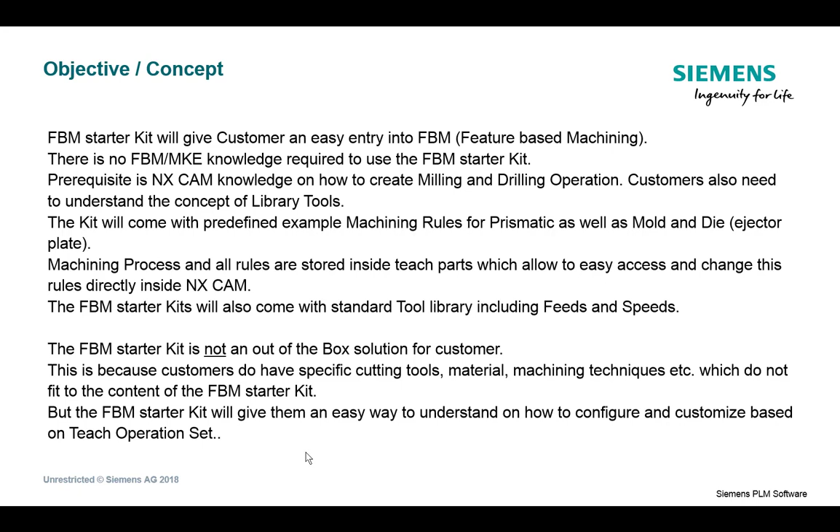The Starter Kit is not an out-of-the-box solution for customers. As we understand, customers will have their own cutting tools, part materials, and machining techniques. The FBM Starter Kit will give them an easy way to understand how to set up and configure their customized environment without any additional training. We recommend a 1 to 2 hour introduction to get started.

The FBM Starter Kit will come with 2 example parts. Both parts are fully scripted, so that you can get an idea how it is working at successful implementation. It's a step-by-step script, so you can follow the script for a mold and die and for a prismatic, as you can see here on the top.

This is a picture of the mold and die example. It's an ejector plate, and on the bottom you see a prismatic part example, which shows some holes and pockets, and including PMI machining. As mentioned, these both are fully scripted, so you get an idea of successful feature-based implementation.

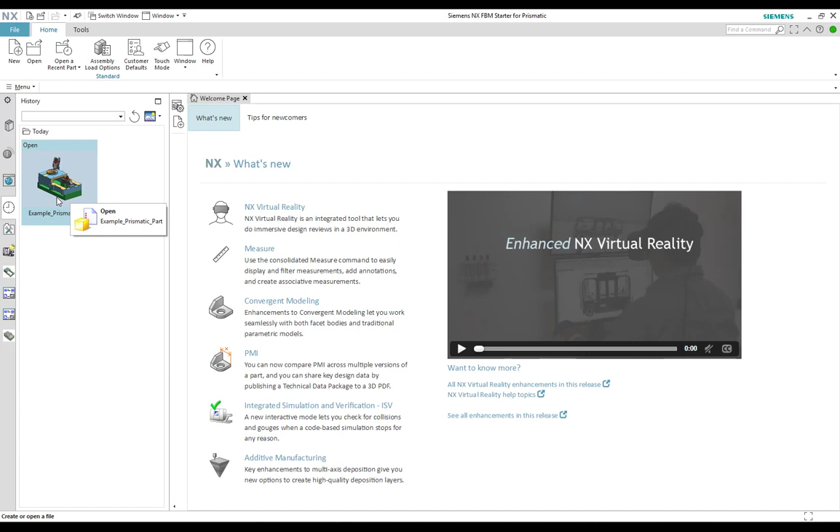Now, let's see how easy it is to program your part if feature-based machining is implemented. This will show the high value of feature-based machining. Keep in mind, this is all done by using the new operation set teaching functionality inside NX CAM. The demo parts, by the way, are also included in the FBM Starter Kit. I will demo the prismatic part example.

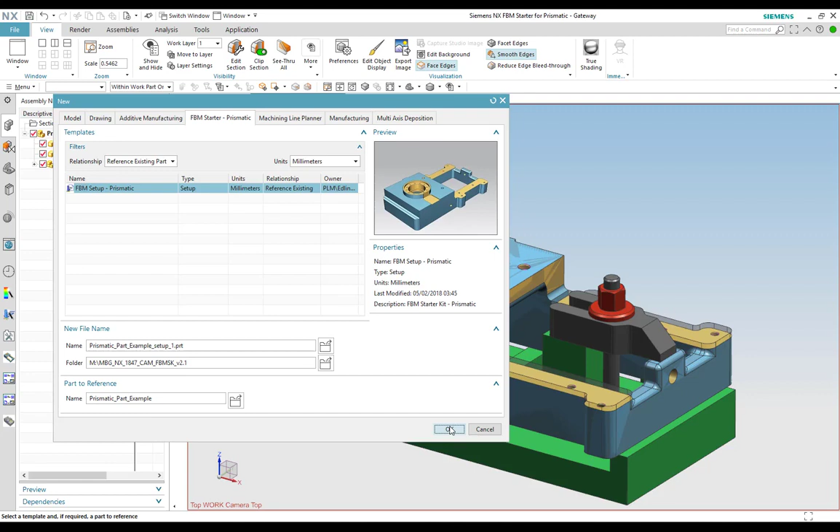First, you open your CAD part. Then you select the correct NX CAM setup to apply it to your CAD part. This NX CAM setup can also include fixtures, machine tools, or cutter information. In my example, the fixtures are already designed inside the CAD part. So this is finally depending on your customer or on your internal process.

After the setup is applied, we assign part, blank, and fixtures into the CAM object. This process can also be automated by NX CAM journaling functionality. An important note on the CAD part you select. It is not required to use a part inside NX CAD or to design the part inside NX CAD. NX CAM feature recognition also supports solids and surfaces imported into NX CAM by a translator.

Inside the workpiece, we also have to select the correct part material, as this is required to automatically assign the correct feeds and speeds into the operations. After this is done, we will change to the feature navigator and recognize all machining features. NX CAM will recognize all standard features, including tolerances and thread information.

As mentioned, it is not required to define the tolerance information inside NX CAD, as some translators also support the translation of PMI, which means you get tolerances and surface information as well as thread information. The FBM automation can then take care of this information.

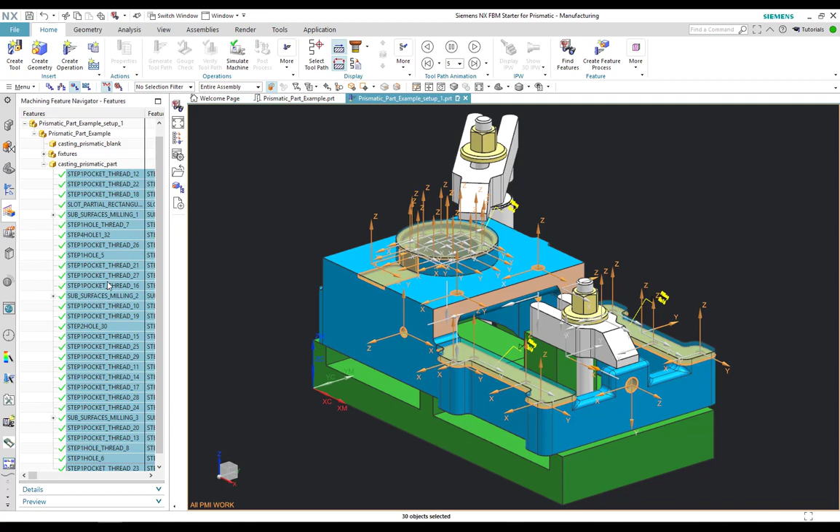By the way, the standard features can also be enhanced by customer-specific feature types. Here you can see all NX CAM features which are recognized on the machining direction.

As a next step, we need to apply the correct machining process. As NX CAM is a very flexible tool, you can have different processes, or teach different processes for the same feature. This is finally customer specific. In the simplest case, you only need to select one process, or the process is already selected and you just need to hit OK.

NX CAM will automatically select the correct cutting tools and create the optimized machining sequence for each feature. As you can see, the feeds and speeds are also created by default, based on the material and on the automatically selected tool.

So the last step is to generate the tool path. After this, you can send the NC code to the machine tool. So now you see the tool path is generated and the NC code is created for all operations.

So finally, there is no need to do any manual programming on such kind of part. For sure, you can mix this up. In NX CAM you're allowed to delete some operations and do the manual programming if this is required.

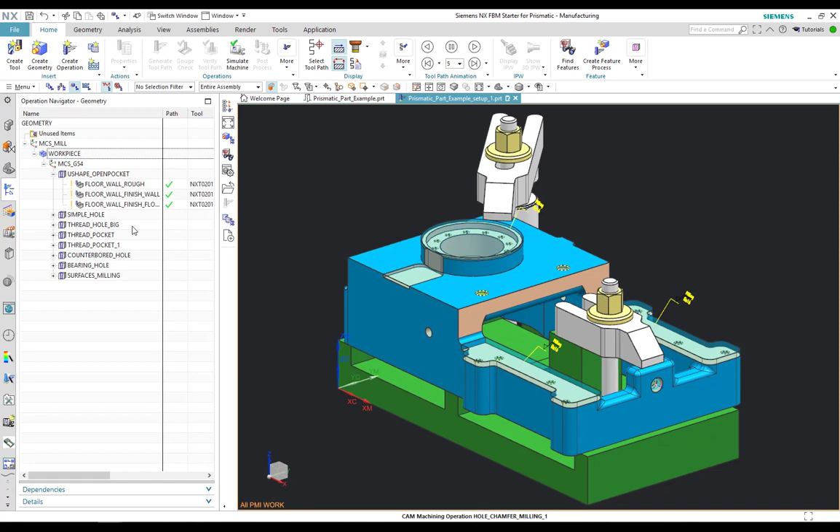Now let's see how easy it is to apply changes to an existing machining sequence. As an example, I will select a different tool here for this finish operation on the pocket. You see 3 operations, and each of these operations has the same tool.

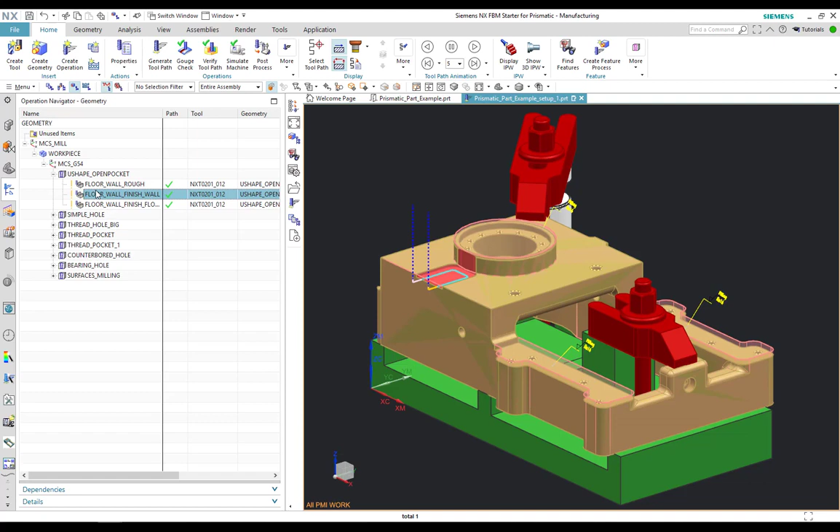So they're all under NXT0201_012. Now, to assign a different tool, you see the tool which is assigned is a 16mm tool.

Now, to change this, I simply need to go and open the tab with the teach features part, with the teach part. And on the teach part, I just need to select the correct feature, which in this case is the lower left, which is the pocket machining.

And if I open the pocket machining, I see the 3 operations which are created, and you can see they are all using the same tool.

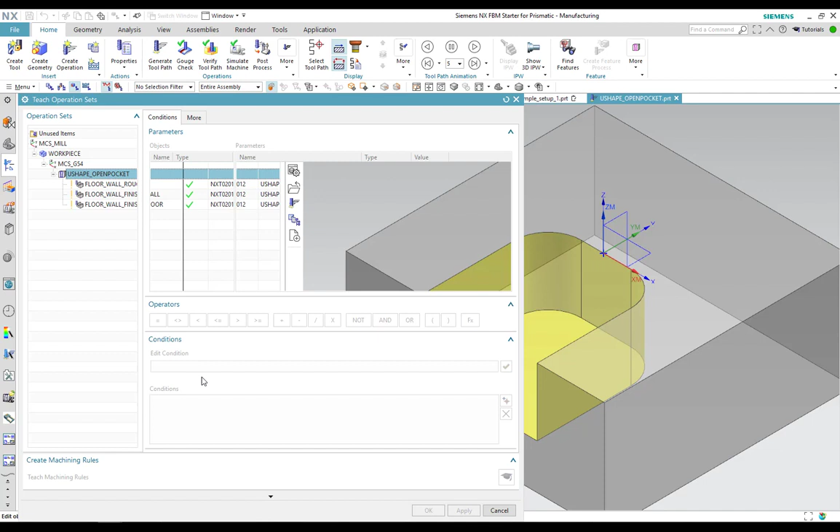And now I use the operation set teaching and assign for the second operation just a different tool. To make it easy, I simply assign a tool with a diameter smaller or equal to 12mm.

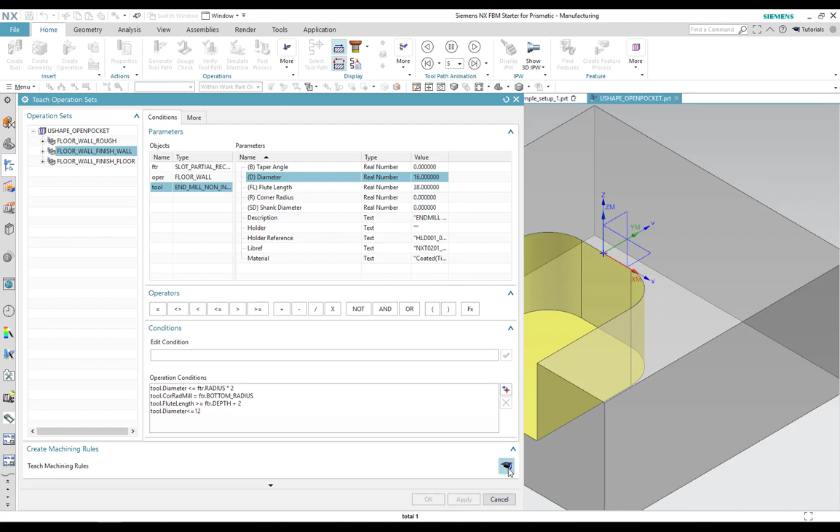So I select the end mill and define the rule: the diameter of the end mill should be smaller or equal to 12mm. Add, teach the rule, and hit OK.

That's it. Now if I go back to my other part, which I already programmed, I delete the process which is already applied. Then I just select the features and apply, or reapply, the process again.

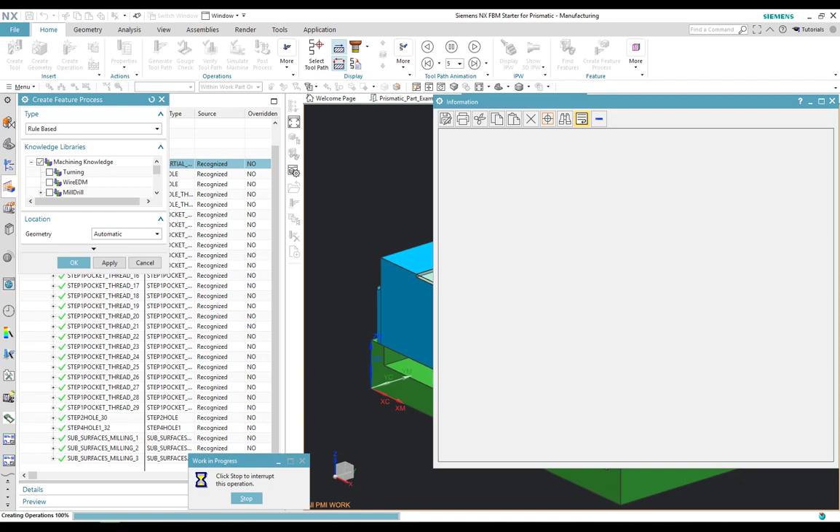And after this is done, you will see that the new feature also has these 3 operations, but the second operation has, in this case, a different tool, which is now a 12mm tool.

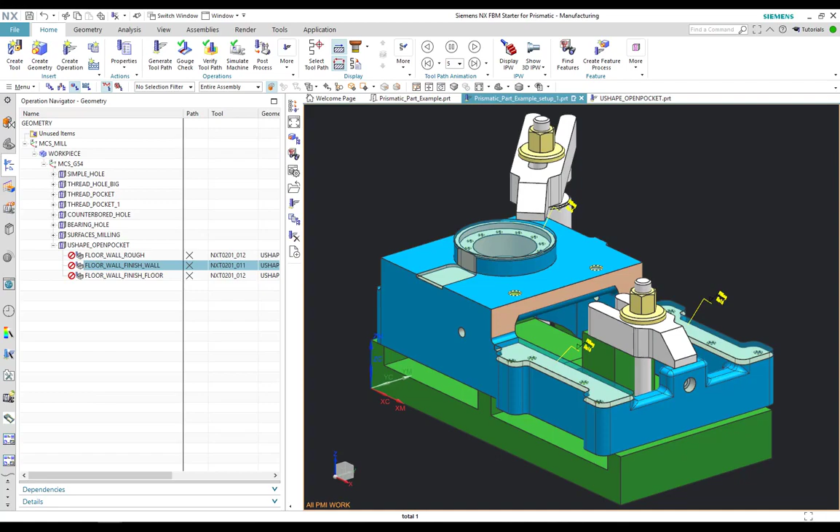So with this, you see how easy and quickly you can change and edit rules for machining or update your rule. The kit will come with predefined teached parts for prismatic machining as well as for mold and die machining.

Each of these teached parts has unique features, and each of these unique features is accessible by this teached part, as you can see here on the right.

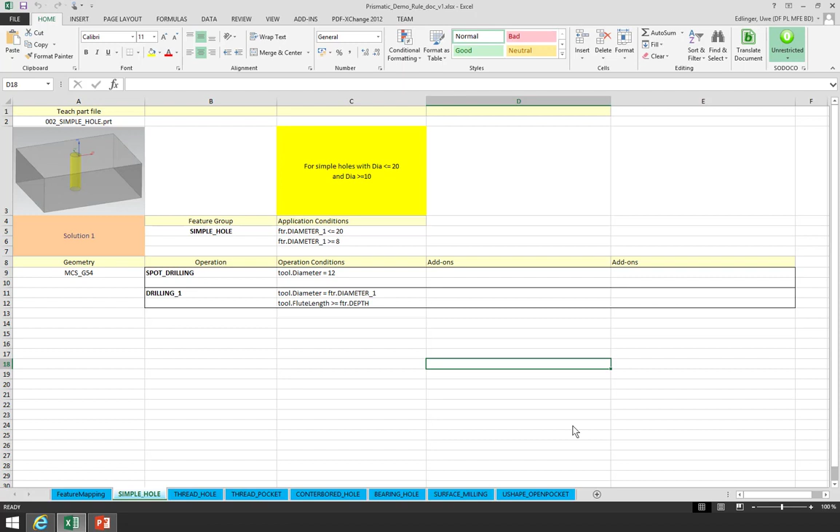To make it easier to understand the rules behind this part, we supply an Excel table with the details of the teach part.

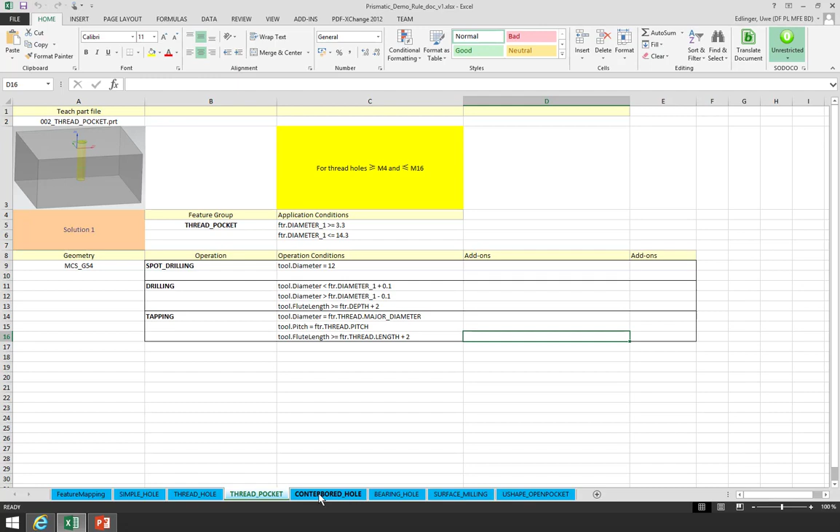So that means, for example, if you look at the teach part for thread hole, you see when the hole is threaded, what the conditions are, in this case between M4 and M16, and what operations are created by using this teach part, and what the conditions are to create the operation, mostly which tool should be selected.

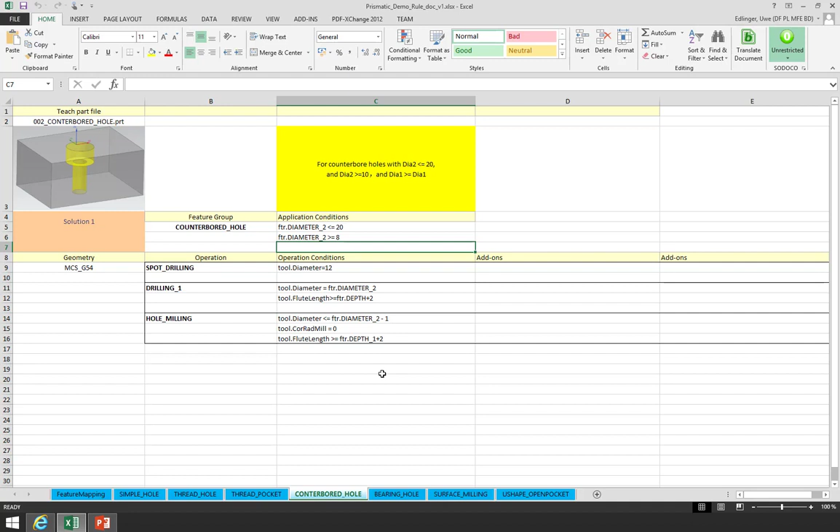This is available for each teach part with all of the details. We recommend customers use the same method: use this Excel sheet, create the teach part for their features, and create the rules and conditions in an Excel sheet to get an overview of the rules, when operations are created, and also which operations are created.

And then later on, just copy and paste this information into NX CAM. This makes everything much easier and much more visible.

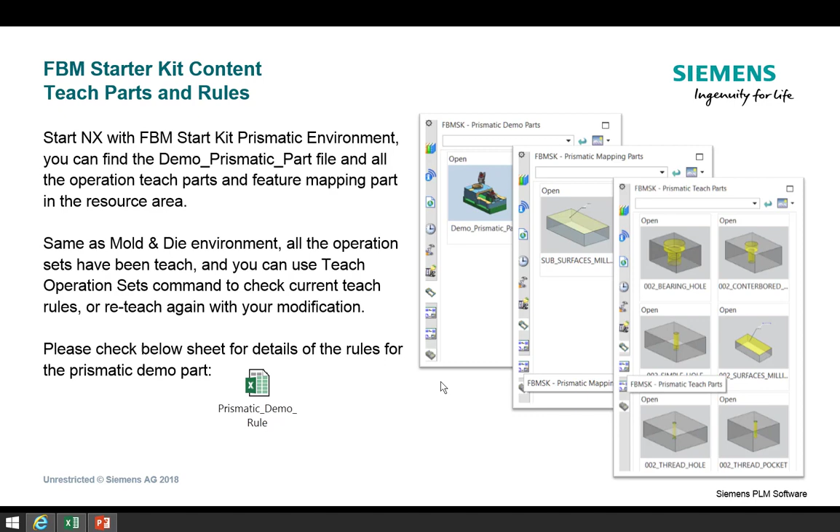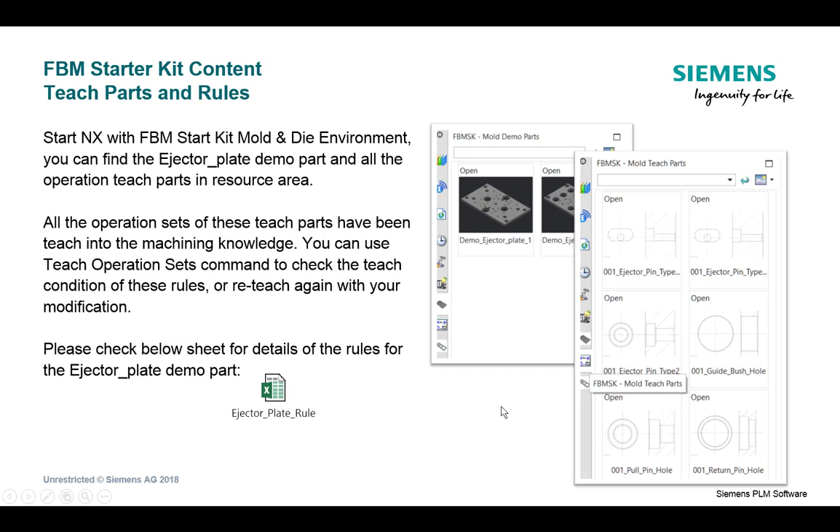The same as mentioned, we have this for the mold and die environment. That means we have two ejector plate parts and ejector pin types available as teach parts. Also here you find an Excel sheet with all of the rules for the ejector plate.

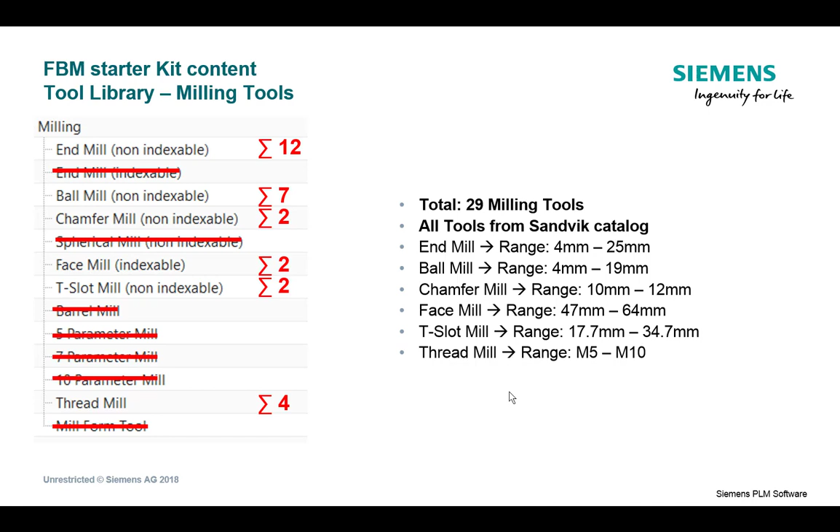The FBM starter kit also contains an out-of-the-box tool library with 29 milling tools, all retrieved from the Sandvik catalog, as well as 185 drilling tools, also retrieved from the Sandvik catalog. Here's a detailed explanation of which tools are available in the tool library, for example twist drill range 3 to 20, index drill 15 to 60, and so on.

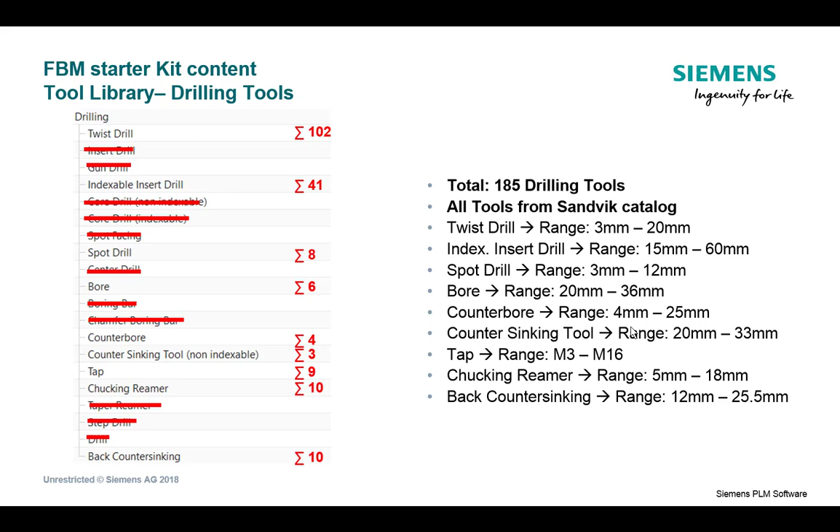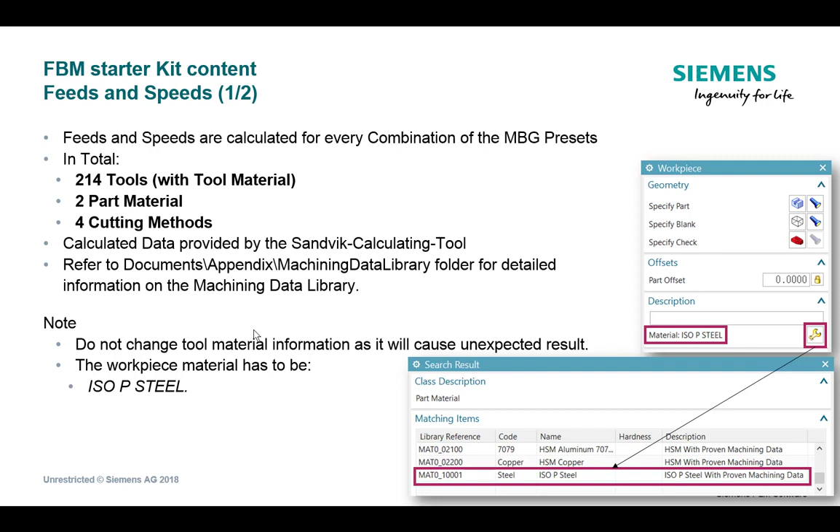This includes the feeds and speeds calculation. The kit comes not only with the tools, but also two real part materials and four cutting methods. All of these combinations are supported by the machining data library, so feeds and speeds are available for all of them. This is the reason why, by using the FBM starter kit, the machining data library is activated, so feeds and speeds are calculated automatically when operations are created.

At the end, just as a summary, many people understand how machining knowledge works and how to edit this with the machining knowledge editor. This is our classic approach. Right now, all feature-based implementations we have are based on the machining knowledge editor. But as mentioned before, for new customers this is very complex. They don't understand at the beginning how this can be implemented, and it takes a long training.

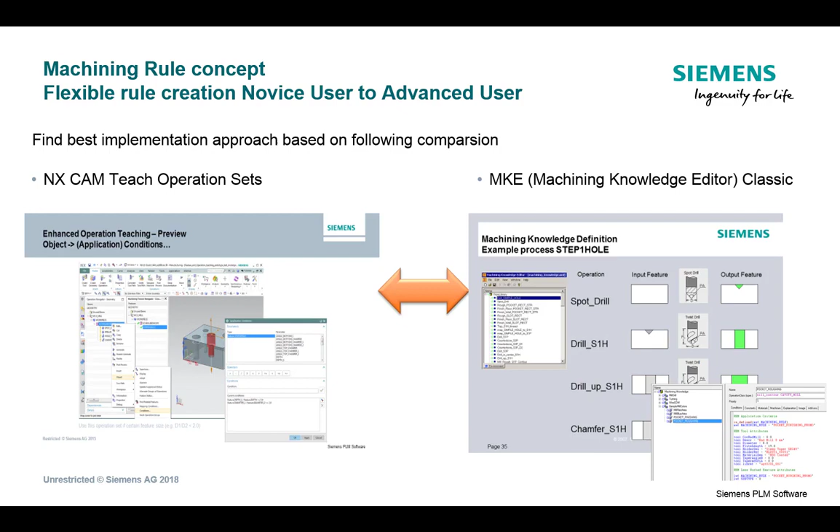For this, we introduced the NX CAM teach operation sets, I think it was NX 10, definitely NX 11, but we were missing the best practice on this and how it should be implemented. Exactly this is the feature-based manufacturing starter kit. It gives customers an easy entry into feature-based manufacturing by using the NX CAM operation set teaching. At the end of the webinar, I want to give you some information about how to install the starter kit.

And what's inside the starter kit, where you can find which information. After downloading, you get a 7-zip file mentioning the minimum version you need to install and the actual version of the starter kit, which is 2.1, around mid of March 2019. You probably will also get a newer version, but from the processor's perspective there is no difference.

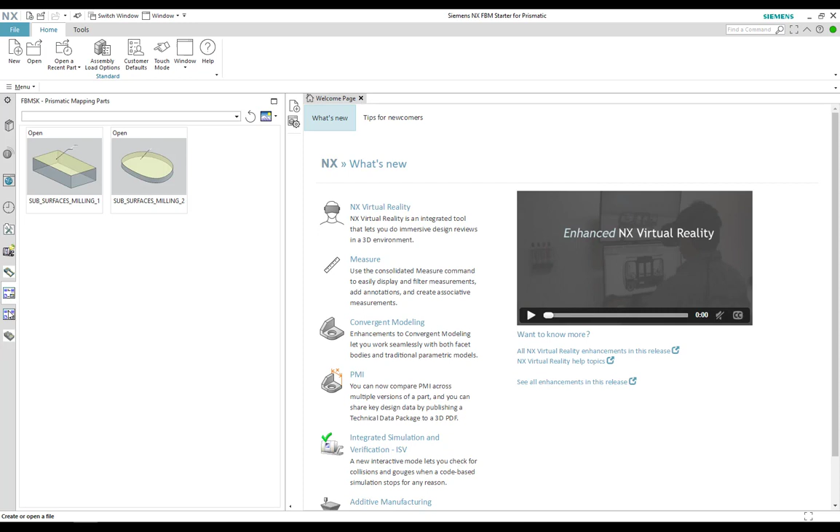Inside the FBM starter kit you find two batch files and some README information which explains how to start and where to find which information. If you double click on the Prismatic file, you jump into NX in a prismatic environment, where you find all of your teach operations and your test parts, as well as the demo environment. If you go down to the directory, you can ignore it, as it only holds some configuration information which is not needed to change.

Inside the documentation you find some Excel files with rules, and you find the example parts as seen before. The example parts give you HTML information on how to do the demo, the same demo you saw a minute ago. You also find the appendix, and inside it detailed information on how to teach operation sets and how to map features. There's an overview on operation set teaching you can take, and you also find how to start the machining knowledge editor in the FBM starter kit environment.